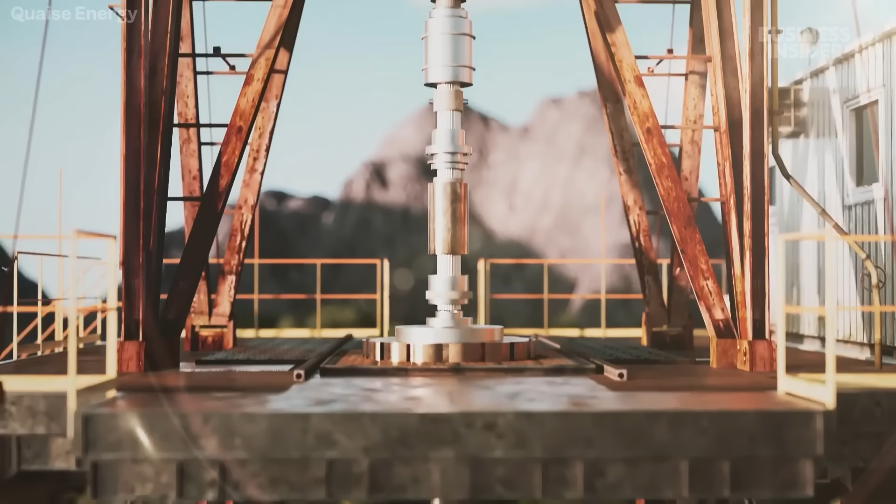Have you ever wondered how deep we could dig into the Earth? No one's ever gone deeper than 12 kilometers, about 7.5 miles, deeper than Mount Everest is tall, and that took the Soviets 20 years. Still, it's just a scratch on the surface, a mere 0.2% of the way to the Earth's core. It turns out the deeper you go, the more the Earth pushes back. But new technology could make it possible to dig further.

Whoa! That's it, it just started to fly apart. Just so you could see how this rock became literally glass.

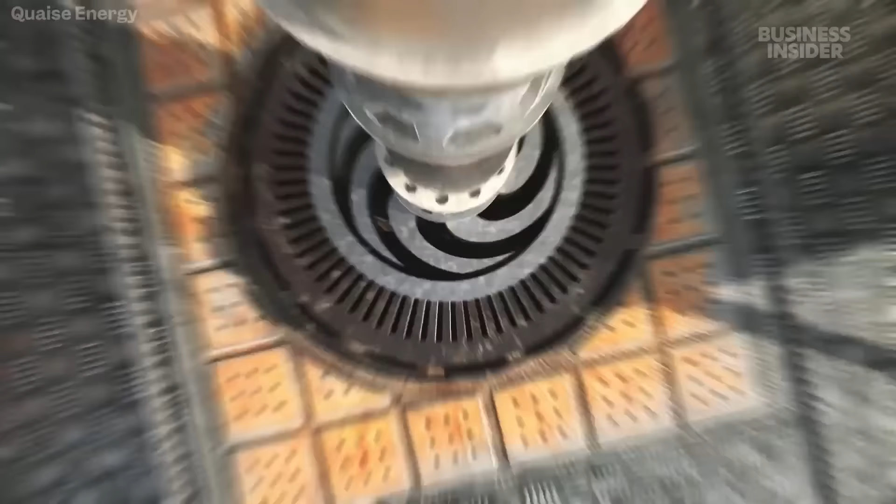And this could be the ticket to unlimited clean energy. At just depths down to 6 kilometers, you could produce 1,400 gigawatts of new geothermal power. That's bigger than the current US power grid. So can these drilling techniques make a 20-kilometer hole possible? And how far down can we actually go?

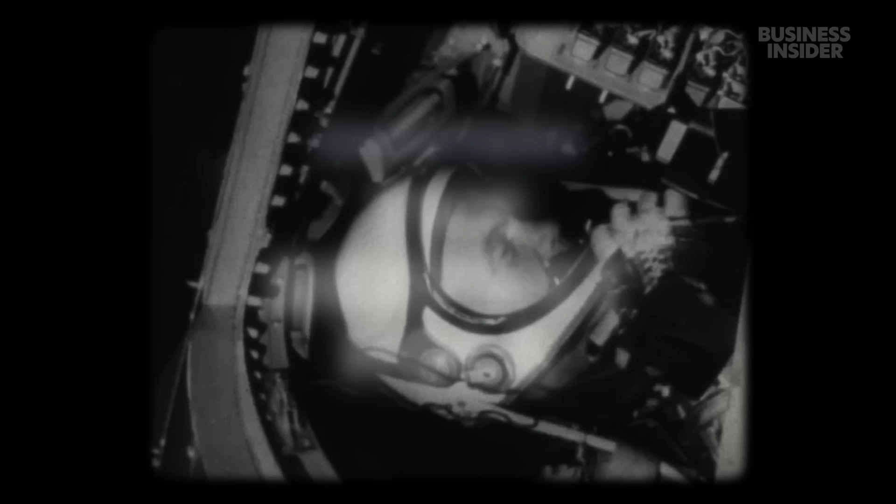Remember the space race between the US and the USSR? At the very same time, another race was underway, not toward the moon, but deep beneath our feet. And this time, the Americans didn't win. The ultimate goal was scientific.

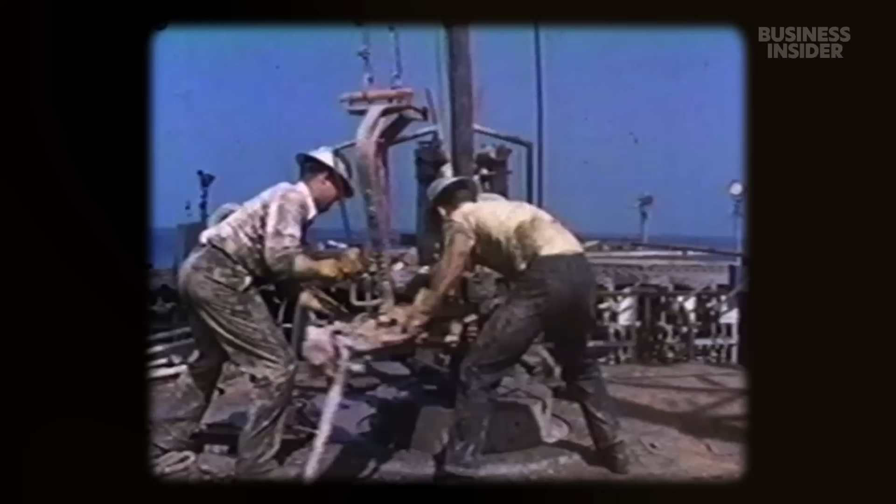The US started with Project Mohole in the 1960s, which hoped one day to drill a hole through the crust of the Earth and find out what's down there. The idea was simple: drill through the ocean floor, where the Earth's crust is thinner, and reach the mantle. In theory, it was the fastest way down.

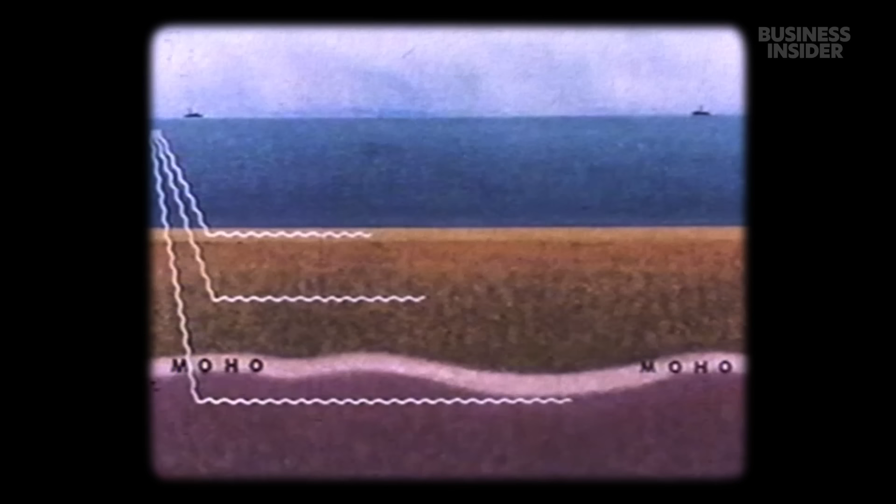To find a suitable spot to dig, researchers actually dropped bombs into the ocean. 3, 2, 1, 0. Over the side, over the side. The charge is over the side. It doesn't get any more American than that.

Then they used sonar readouts to measure the thickness of the Earth's crust. But after years of work and millions of dollars, it made it just 183 meters into the seabed, that's less than 2 football fields. The project was eventually cut short due to lack of funding, but the techniques they developed led to a boom in offshore oil drilling.

Meanwhile, the Soviet Union began drilling on the Kola Peninsula in the Arctic Circle. Back then, researchers expected to hit 15 kilometers, about 9.3 miles. But after 20 years of drilling, they reached a depth of 12,262 meters, that's deeper than the deepest point of the ocean, the Mariana Trench, located in the Pacific Ocean.

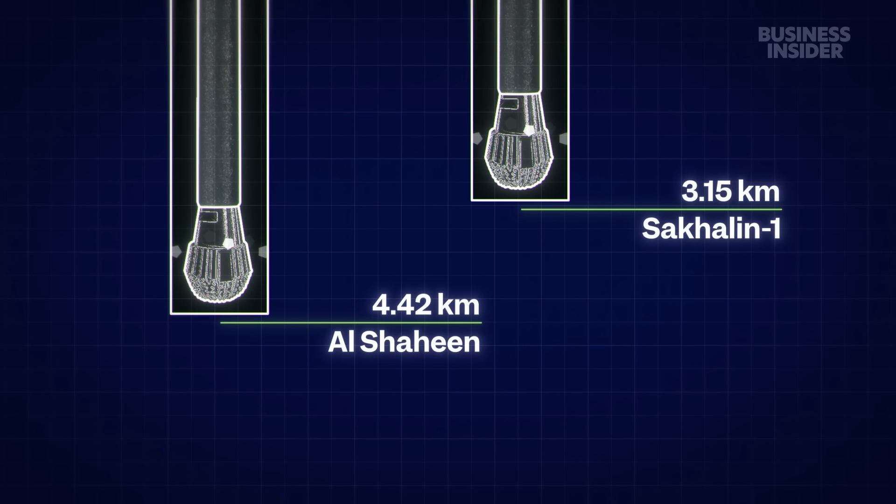Since then, there have been oil wells that dug for longer stretches, like the Al Shaheen well in Qatar and one in Russia. But this type of exploratory drilling doesn't actually go straight down, these wells often veer sideways for long stretches looking for those reservoirs of hydrocarbons. So to this day, the Kola borehole remains the deepest vertical hole.

Because the deeper you go, the hotter it gets. As we get below sort of 12, 15, 18,000 feet, we're getting into very hot formations, very high temperatures where actual drilling tools are struggling to survive.

So if we want to go deeper than Kola, we need tech that can withstand temperatures that rise about 25 degrees Celsius per kilometer. Look at the geothermal gradient and you can see the heat increase isn't linear. Things get super hot long before you reach the mantle, a layer of Earth that no one has yet hit. As you go deeper still, temperatures can climb into the thousands of degrees. In fact, 99% of Earth's mass is hotter than 1,000 degrees Celsius.

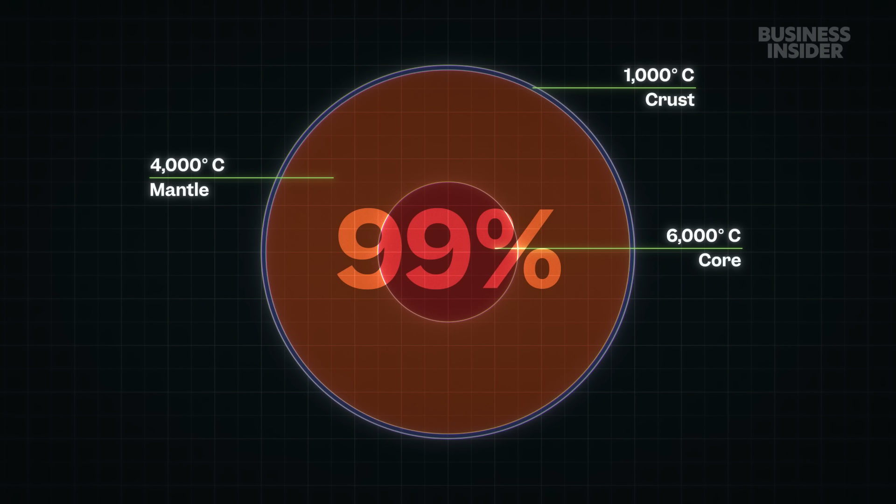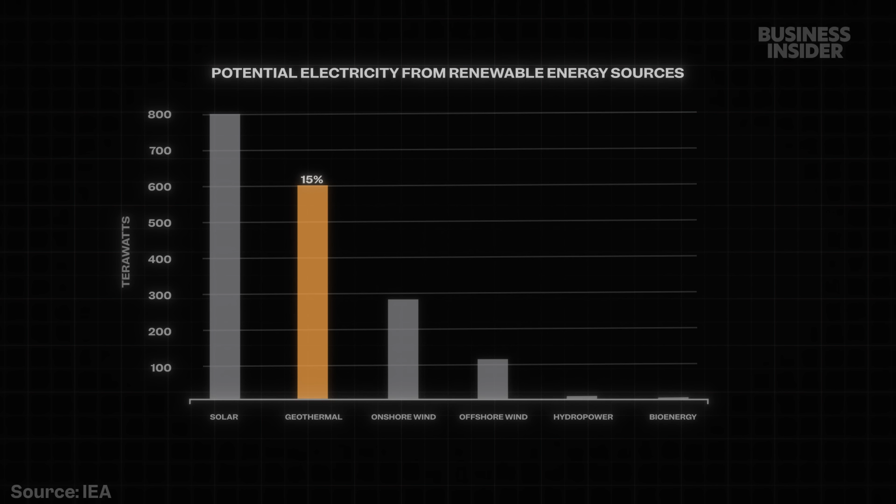But that heat is also exactly what makes geothermal energy possible, because if we can tap into it, it becomes a near limitless source of clean power. Right now, geothermal meets less than 1% of global energy demand. But if the technology keeps getting better, geothermal could cover up to 15% of the world's new electricity demand by 2050. So how does it work?

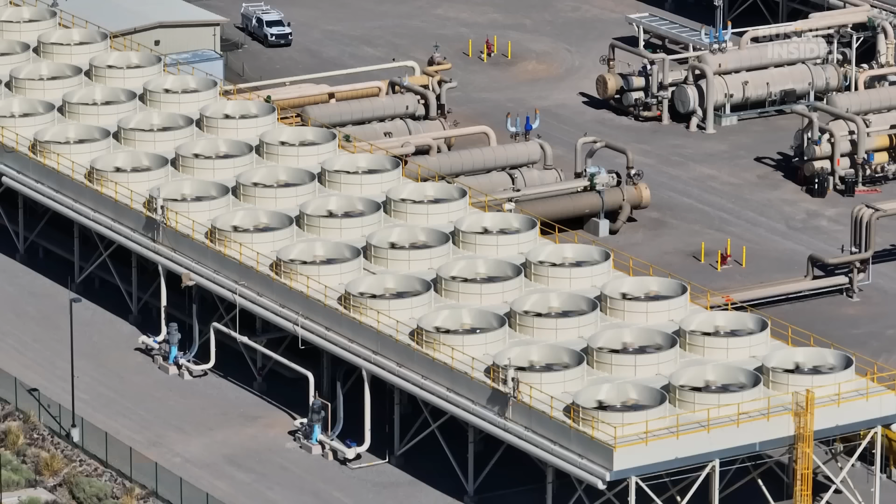Inject water deep underground or dig into existing reservoirs, then use heat from the Earth to turn it into steam. That steam spins turbines and generates electricity. Unlike solar and wind, geothermal could provide electricity 24 hours a day and all year round.

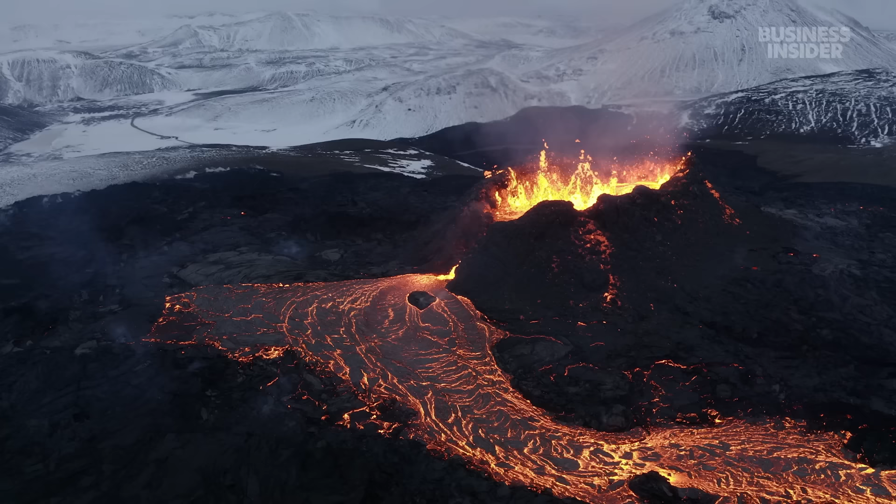This is exactly what happens in places like Iceland, where volcanic activity brings a lot of that underground heat closer to the surface. In Iceland, they actually made contact with magma at only 2.5 kilometers below the surface.

Iceland's large-scale shift to geothermal energy was driven by the 1973 oil crisis, when rising prices and geopolitical instability highlighted the risks of energy dependence. At the time, half of the homes relied on imported fossil fuel for heating, which was expensive for the country. So Iceland turned underground. Today, nearly 30% of the country's electricity comes from geothermal, and about 90% of homes there are heated this way. And Iceland is not alone.

That's why we're in Houston, Texas today, and we're going to a company called Quaise that's digging deeper using literal energy beams to vaporize rock. All right, so this is where the magic happens.

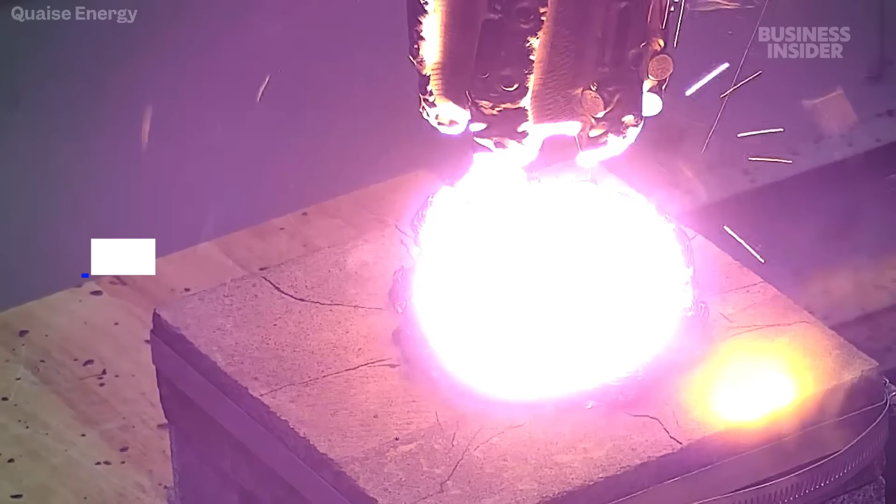Quaise is a startup with a very ambitious goal. They want to be able to drill down to 20 kilometers underground. At that depth, the temperature can reach up to 500 degrees Celsius, which is enough to destroy any kind of conventional drilling equipment. That's why they're using something called millimeter wave. And the idea behind it is that it's using a special kind of technology that comes from fusion energy to literally shoot at the rock and vaporize it, melting it into glass.

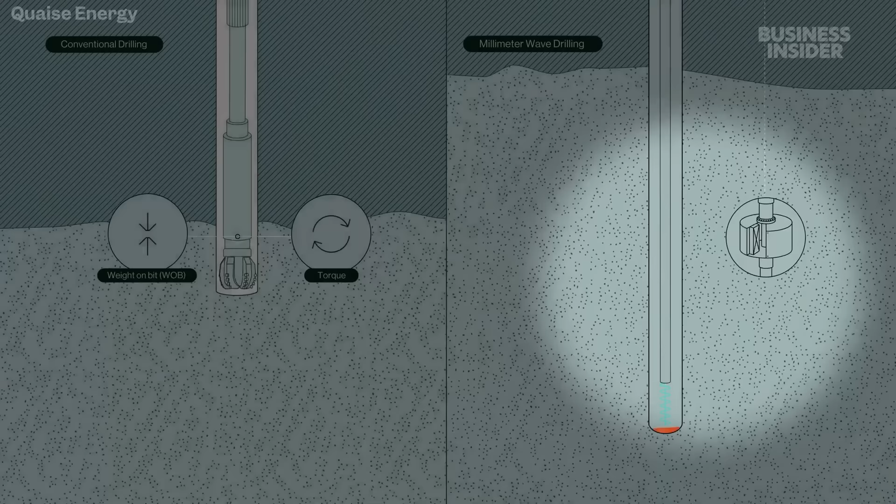In the simplest layman's terms possible, what is millimeter wave drilling? Millimeter wave drilling is using microwave to do dielectric heating to get to very hot rock. Conventional drilling uses a mechanical bit to pulverize rock, but at extreme depths, it gets harder to power the system and it breaks a lot. Quaise uses electromagnetic energy to melt rock, and in theory, the millimeter waves maintain their power even over long distances.

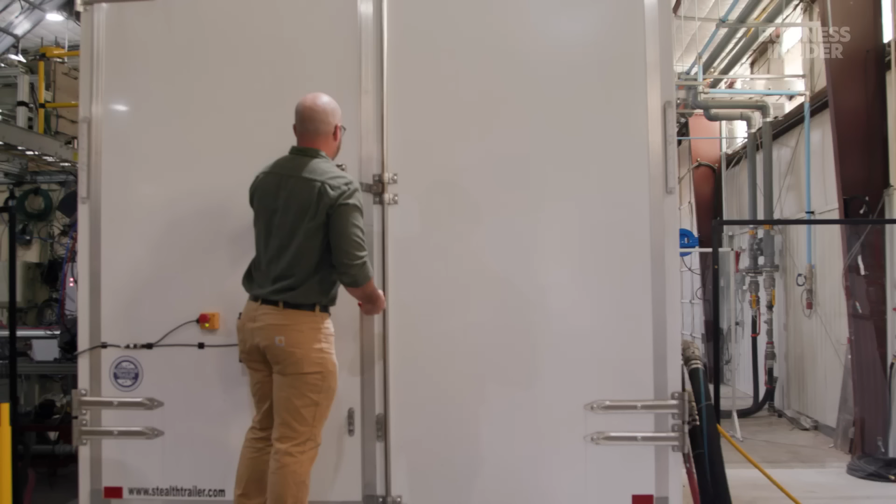It took MIT over a decade to develop this technique in a lab. The device that creates the energy beam hot enough to do this is called a gyrotron, and it actually originates in nuclear fusion energy. It converts electrical power to microwave power. That's important for us because it's able to make upward of 1 megawatt of microwave power. You can see that the magnet's on because it's using electromagnetism.

So apparently, I don't know what would happen. Would it suck? It would suck our cameras right to it, or it could disturb some of it. Yeah. We don't bring our phones in there. We don't bring any kind of tools that are magnetic in there. Oh, okay. So it could fly. It's like an MRI machine. Oh, it's like an MRI. So yeah, you know what? And actually, if you hear, I'm gonna put the microphone closer to there. If you hear, it actually sounds exactly like an MRI. If you've ever gotten an MRI, so listen to this.

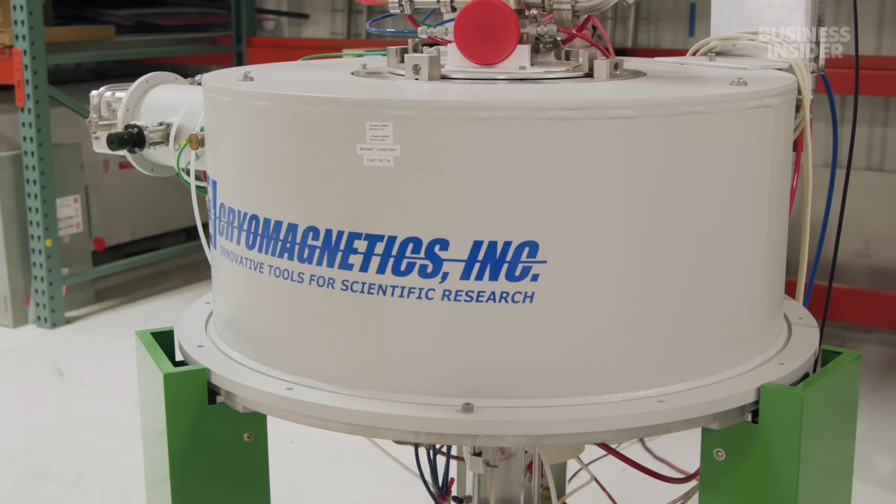That's actually the sound of the cooling system. The gyrotron's superconducting magnet needs to stay near negative 270 degrees Celsius to function properly.

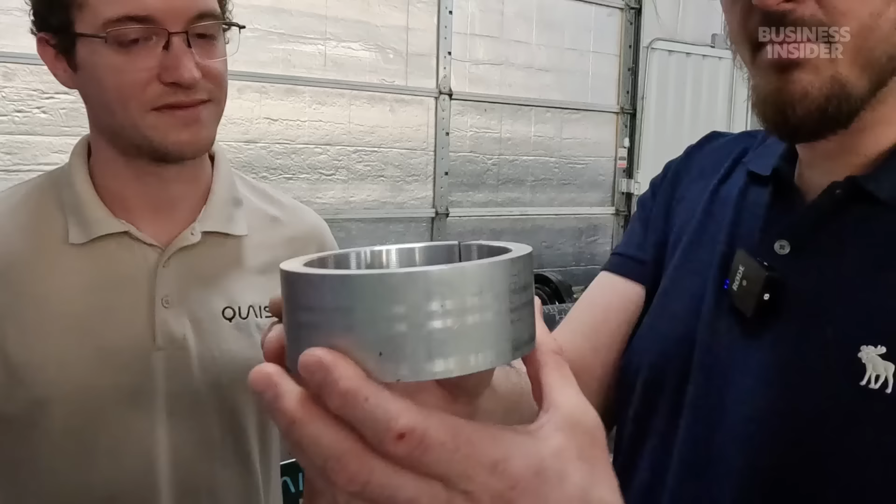Quaise channels the beam through a hollow pipe that looks like it has screw threads inside. So what you see here is the waveguide, and the millimeter wave is actually going inside there, all the way to the bottom. So basically, this kind of pipe is what's going to be going all the way down any hole you dig, right? That's right. So we start with a conventional drill rig to drill as deep as they can, and then we come with our technology.

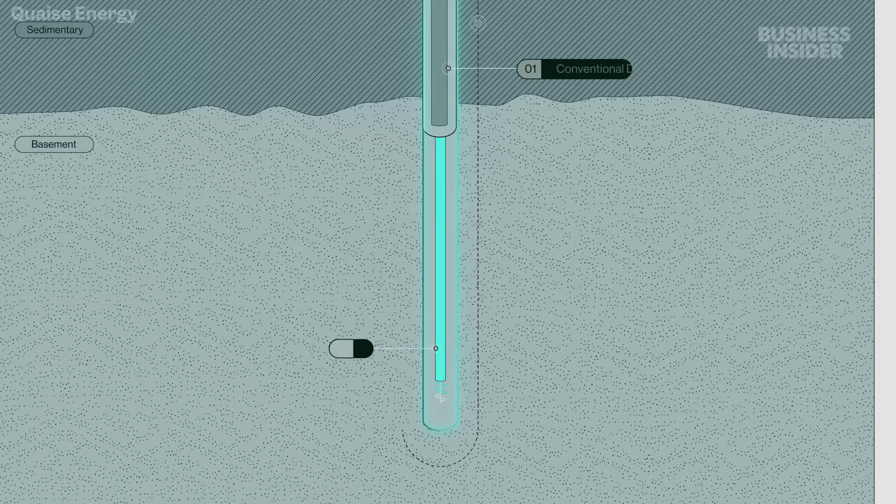So the Quaise approach is less like drilling and more like burning a hole through the earth. In theory, this solves one of the biggest problems. If nothing touches the rock, nothing overheats. The way we address it is that we're not putting equipment down hole that could be subjected to the temperature that could damage or fail the drilling process in that regard. So we're not eliminating the heat. Obviously we want to get to the heat, but we're able to continue drilling in spite of the heat.

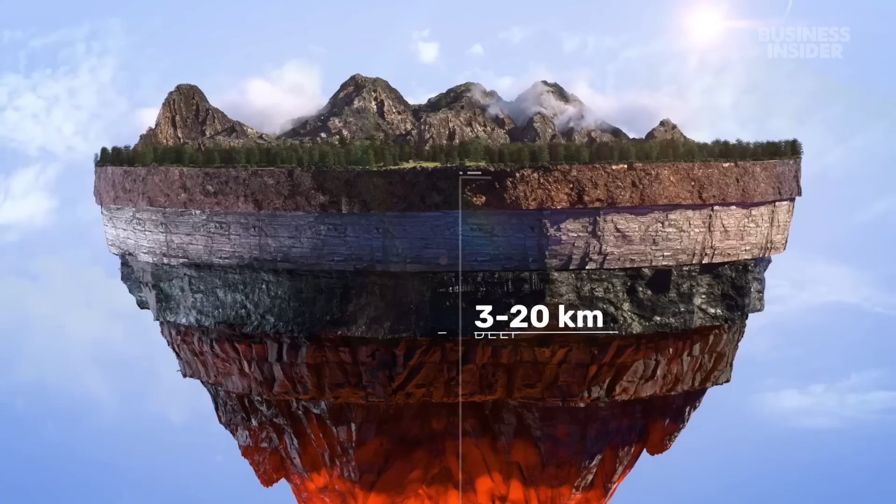Here's why they want rock that hot. At those temperatures and pressures, water enters a fourth state called supercritical. It's not quite gas and it's not quite liquid, and it carries far more energy than steam. Quaise says a single supercritical well could produce up to 10 times as much energy as a conventional geothermal project.

And Quaise gave us a live demonstration on how they plan to reach it. We're gonna put in earplugs, not because of the millimeter wave, but because the compressed air that comes into the system is very loud. So I'm putting in earplugs right now.

Whoa! Isn't that insane? The light is completely bright. I guess you can see how the air is pushing all the other stuff out of the way.

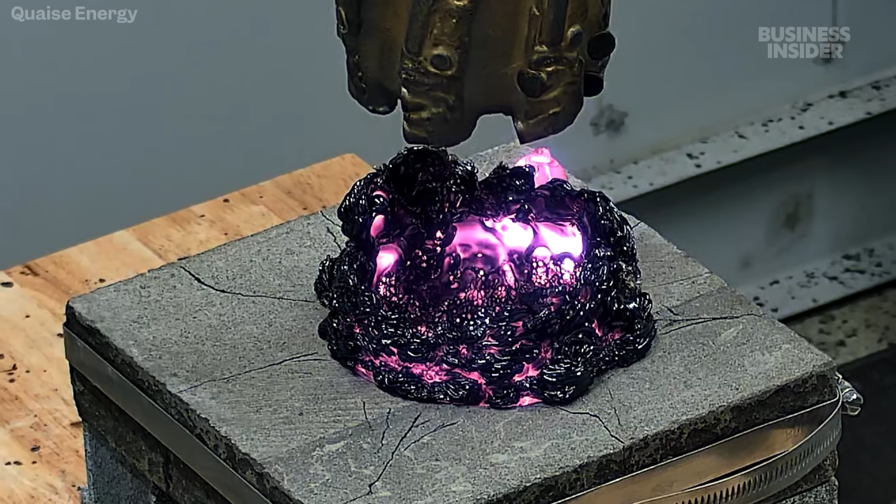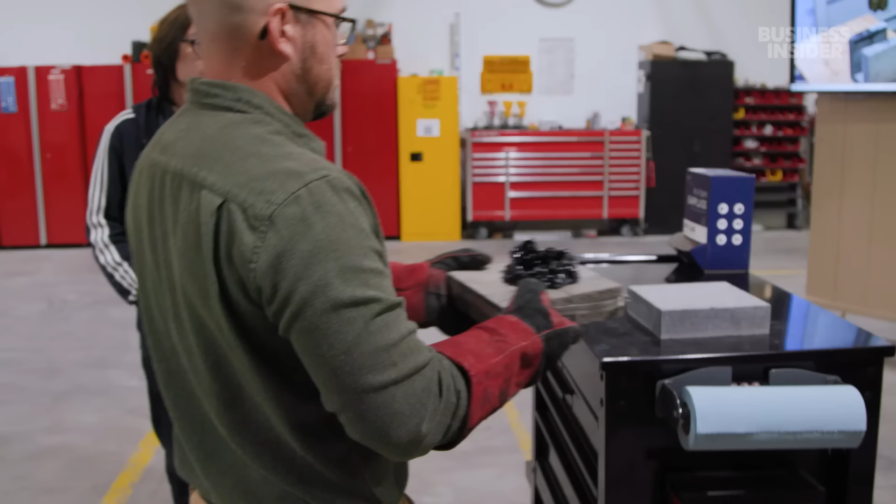Okay, 30 more seconds to go. That's it. Oh man, that's so cool. You could see it's like lava cooling, right? I'd say the heat hitting my hands right now is probably like a campfire that's died down—not too hot to touch. I can still hear it crackling, which is kind of gnarly, but you can see how this rock became literally glass.

If the drilling thing doesn't work out, maybe you guys can use this to get into a bank vault or something, I don't know. Well, we said we could just make ashtrays. I know people don't smoke anymore, but that would be an awesome ashtray.

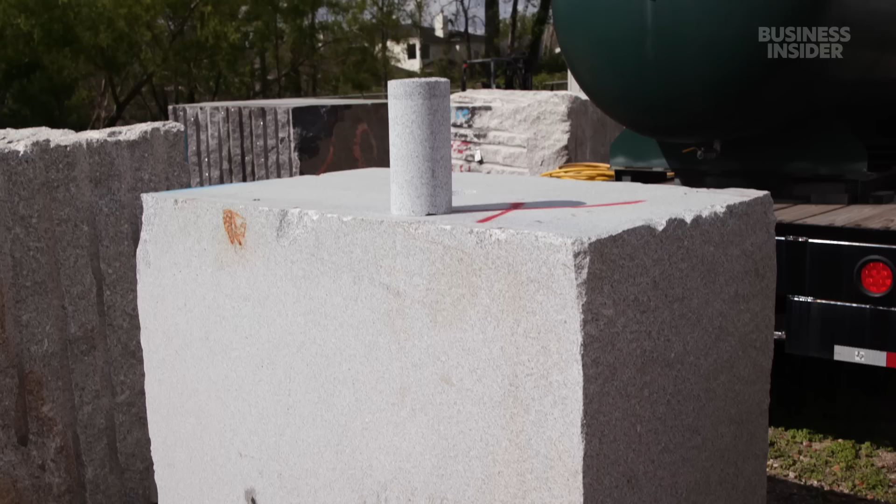To understand what they might encounter deep underground, Quaise hauls huge chunks of rock into the lab. We're out back of the lab now. These are 10,000-pound blocks of rock, representing the different kinds of rock Quaise might encounter once they start digging down. They use these for testing, and they're very heavy and very expensive to get here.

How the hell do you move these things? It is incredibly expensive—obviously you need a big forklift that can carry the weight. It's also incredibly expensive just getting it from a quarry of this size to us. It's just part of the business.

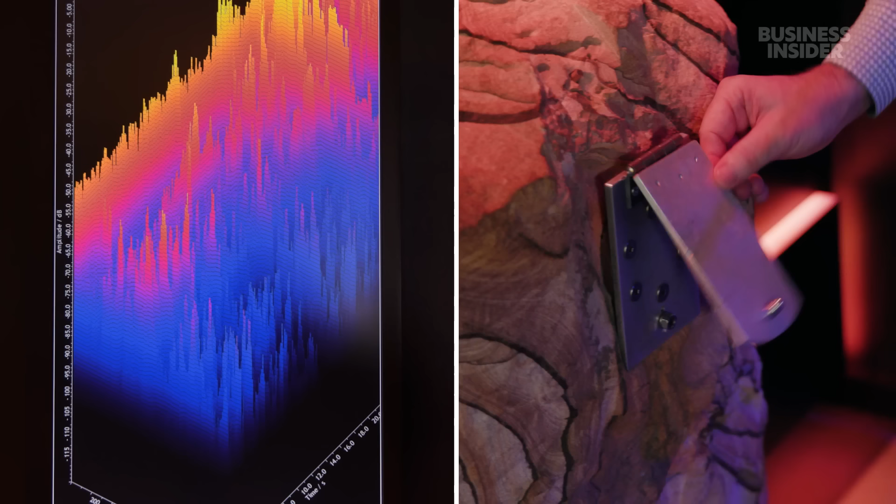But even if you solve heat, there's another problem: pressure. There are even more challenges when you're digging super deep. To show you what that looks like, we came to the Wiess Energy Hall at the Houston Museum of Natural Science. We're going to take you around and show you a couple of exhibits in a way you can't see anywhere else.

So what you see above me is a gigantic representation of a drill bit coming down a borehole. This is probably 30 or 40 times the scale, but it gives you a sense of how these rotating bits create momentum going down into the hole, removing material and pushing it out towards the sides.

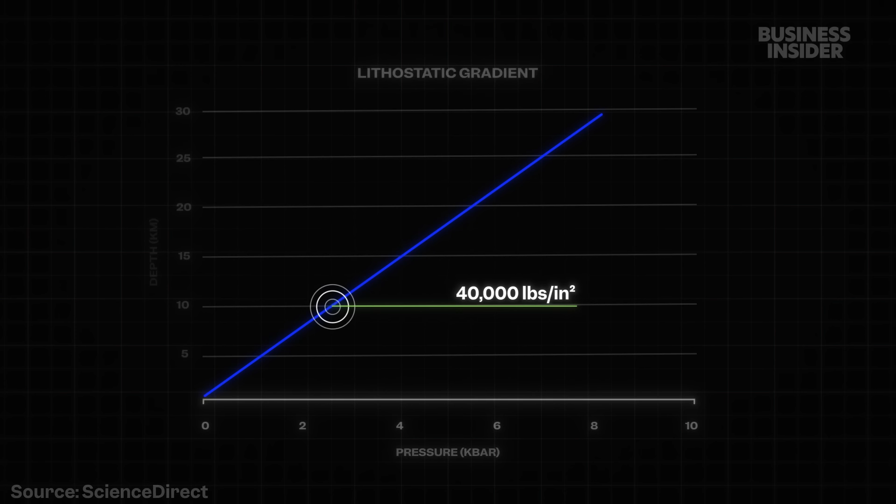Once you're getting down deeper and deeper, the rock isn't just hot, it's also heavy. That's what engineers call lithostatic pressure. At 10 kilometers down, you're under 40,000 pounds of pressure per square inch. You're basically trying to hold something open that wants to close.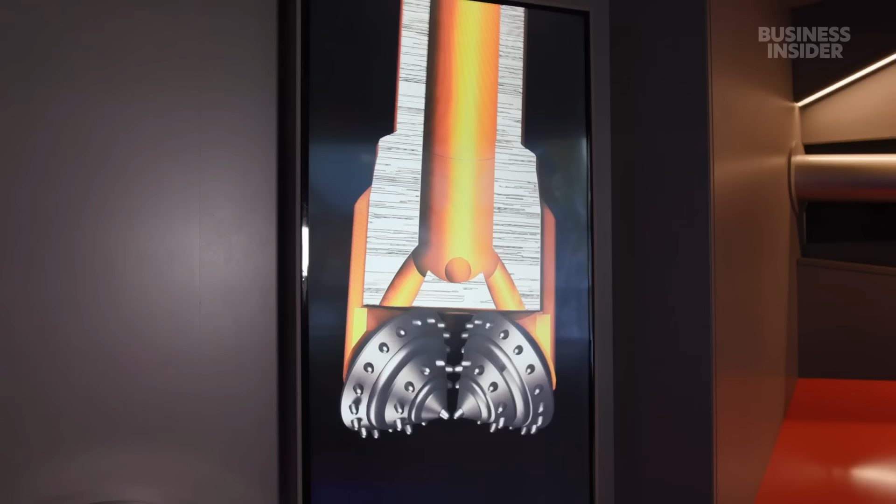So what engineers do is something that might seem counterintuitive—they actually fill the holes they dig with drilling mud. This drilling mud does three things: first, it cools the bit; second, it lubricates the entire system; and third, it counteracts the pressure acting on the borehole as they go deeper and deeper.

What this display is showing is that this mud has a viscosity meant to slow down the flow of the balls going downwards. You can see how getting that dialed in just right is important to keeping the borehole stable.

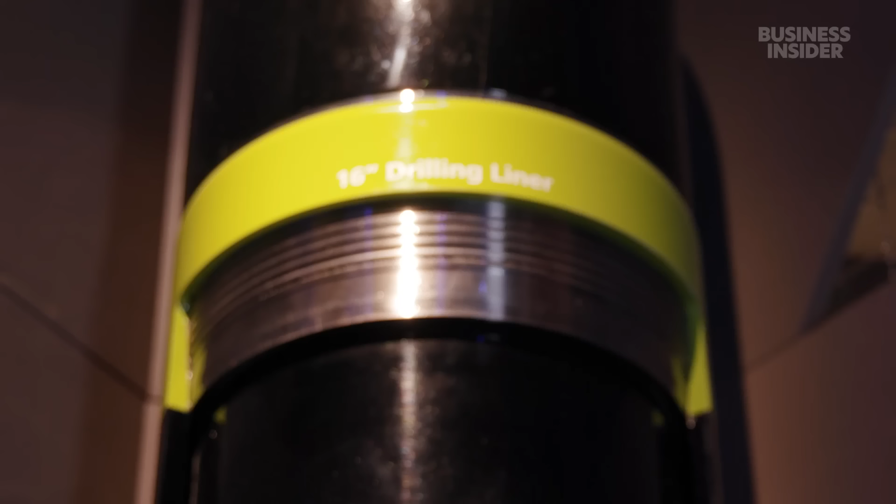As you go deeper, something even stranger happens—the rock stops acting like a solid block and starts acting more like plastic. That's where casing comes in, holding up the sides of the borehole as you go down and allowing you to drop a narrower and narrower channel of pipe to reach those deeper depths. As you can see from this example, we've started out with the widest possible drilling bore, 16 inches, and it goes all the way down to 5.5 inches.

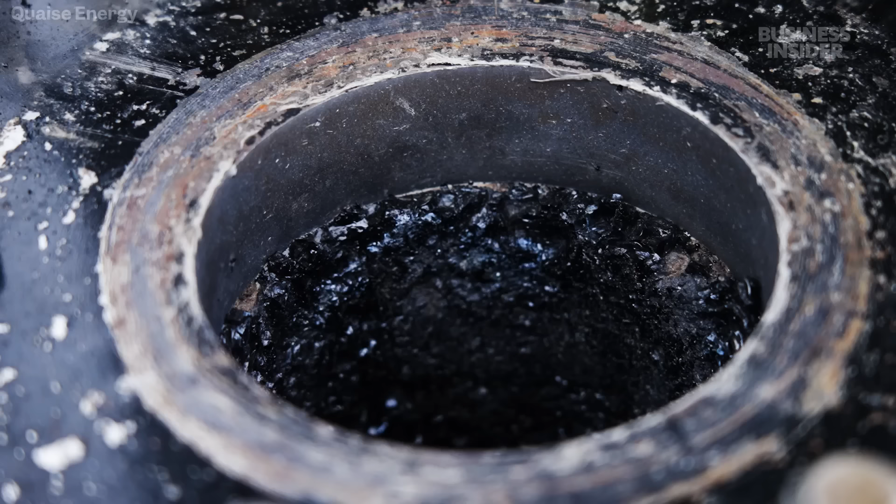Quaise believes their system could also solve the casing issue. As the rock melted by the millimeter waves cools, it solidifies into a glassy lining around the borehole, creating a hardened layer that helps keep the hole stable. Just feeling the texture of it, I do feel that volcanic glass feel.

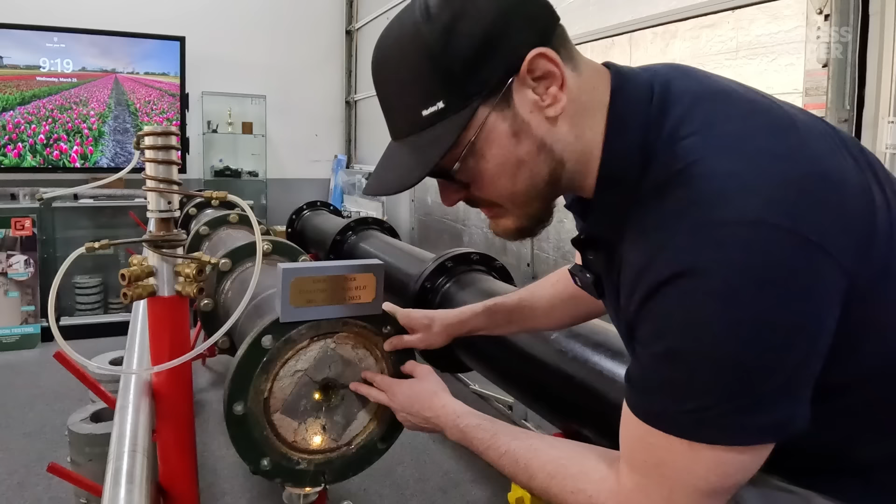It reminds me of when you had a piece of obsidian, if you ever had a rock collection at home—that's really what it feels like. In other words, it's a sort of ready-made casing.

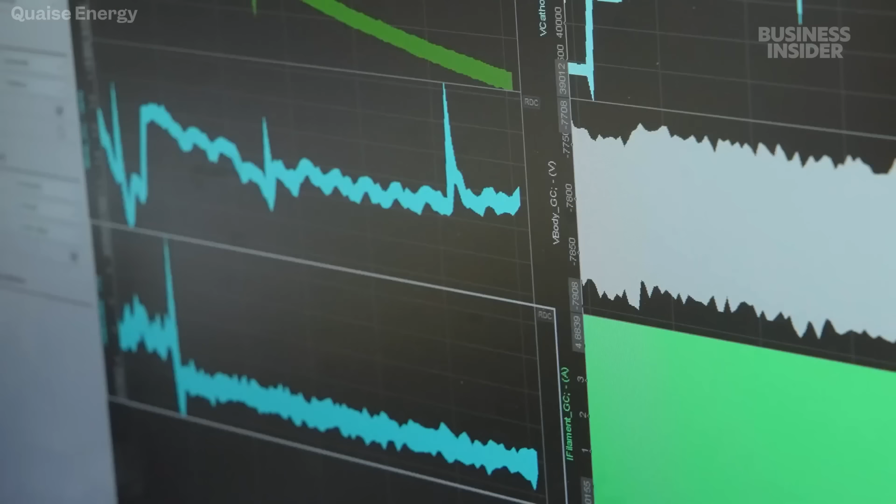But can this work at extreme depths? Over the years, Quaise has proven they could dig past 100 meters, and now they've set up a test site in Marble Falls, Texas, where they're aiming to reach 1 kilometer by the end of the year. We really want to show that we're going to do 1 kilometer, and it's really to show that we're very close to our goal of 10 kilometers. It's 10x more, but 1 kilometer really gives you that depth where it is a viable option from a field point of view. We hit the road to find out.

This morning, we were heading from Houston, Texas, where Quaise's lab is, to their test site in Marble Falls, which is on the other side of Austin, where Quaise is actually bringing their technology to life in the real world.

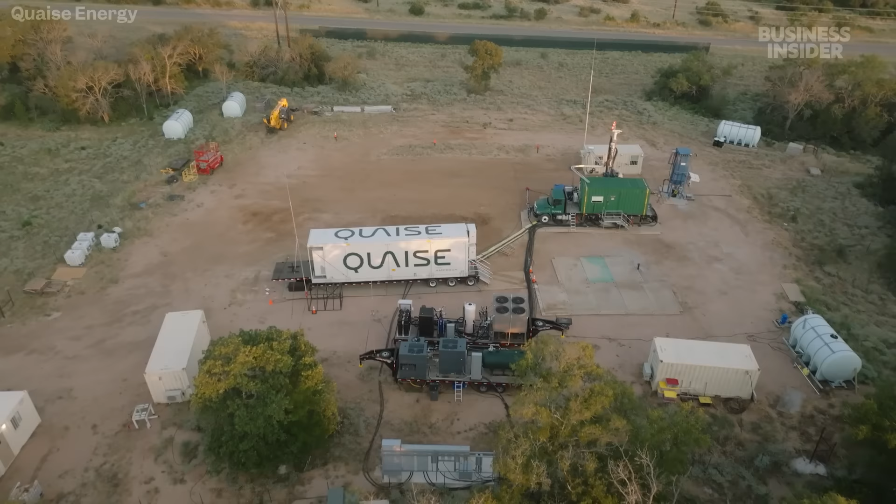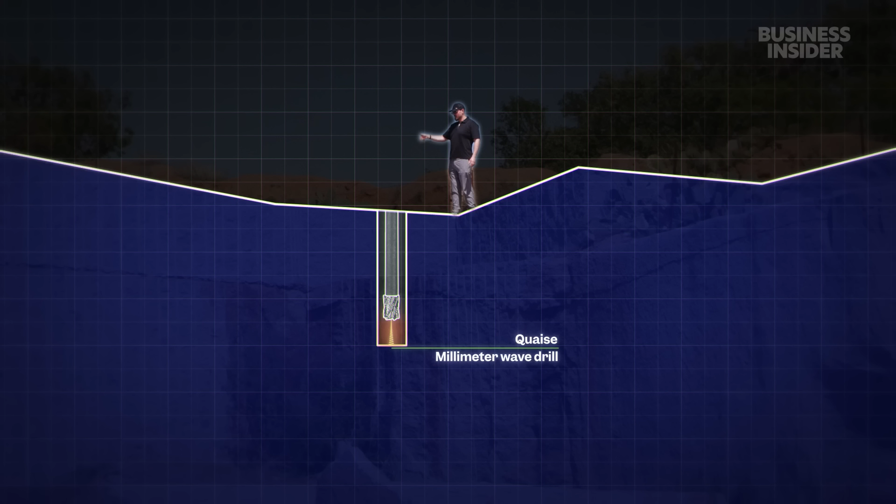I'm standing at the edge of a granite quarry, and you can see why Quaise would select this site to test their technology. Behind me, there's layers of sand and clay that have accumulated—that's called overburden. But not much further down, you've got this nice pink granite everywhere. What Quaise is able to do is, without digging too deep, get to this granite layer and start using their millimeter wave drill to really get through it. This is a perfect site for Quaise to start proving that their technology works on the hardest rock, found in the deepest layers, to get to that supercritical geothermal.

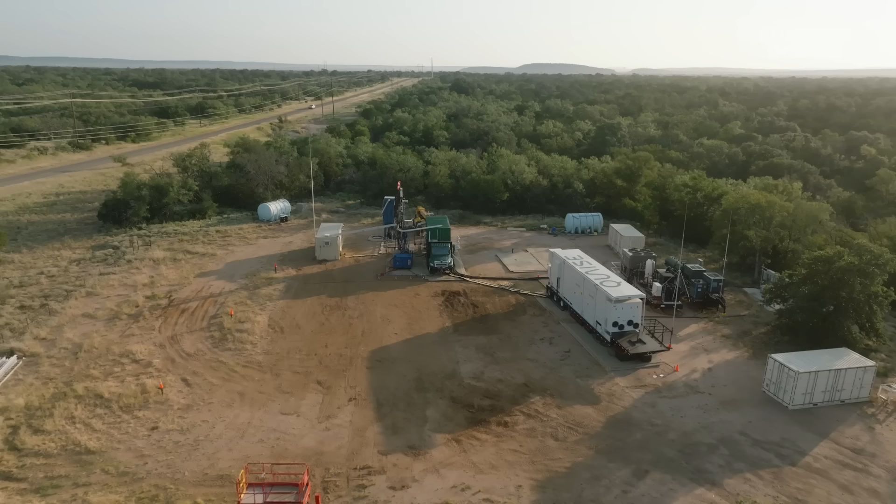This is the first location where Quaise has taken their technology out of the lab setting and into the real world. And obviously it's a work site, so I've got to have my hard hat and my safety glasses here.

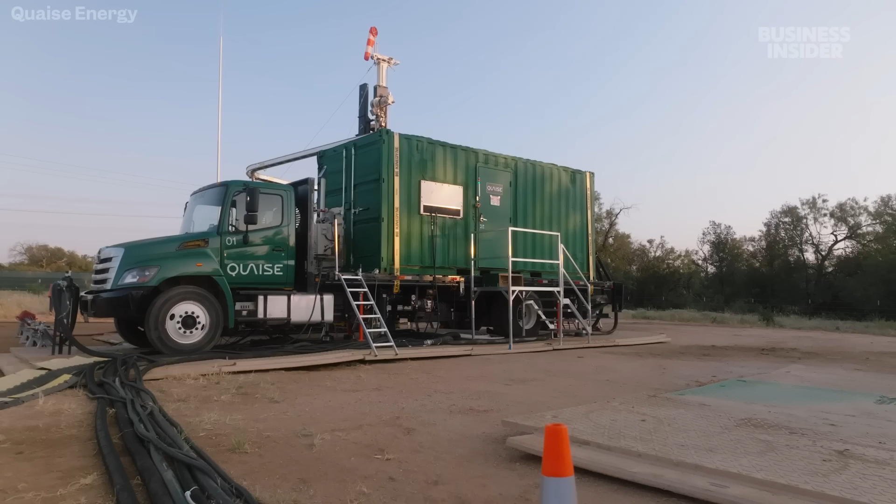Okay, let's go. The gyrotron rig here can run on diesel, but for now it's connected to the grid. I wonder what your monthly electricity bill is. It's not great.

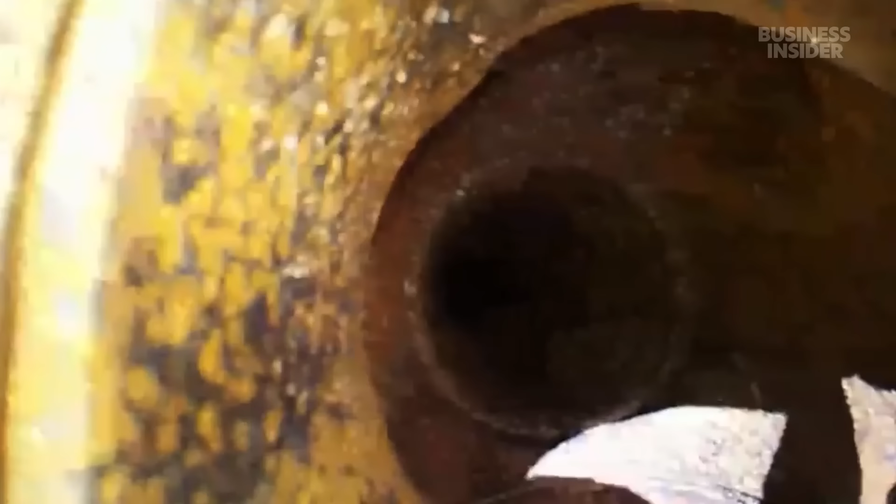So Steve, this hole is going to be the 1 kilometer hole? That is correct, yep. So we'll be up and drilling in about 6 weeks, and then we're expecting to hit it in the summer. So we're talking maybe 2 months to get to 1 kilometer on this. They're going to take this wireline camera and drop it down the existing hole, so we're going to get an inside peek into the beginning of the 1 kilometer hole.

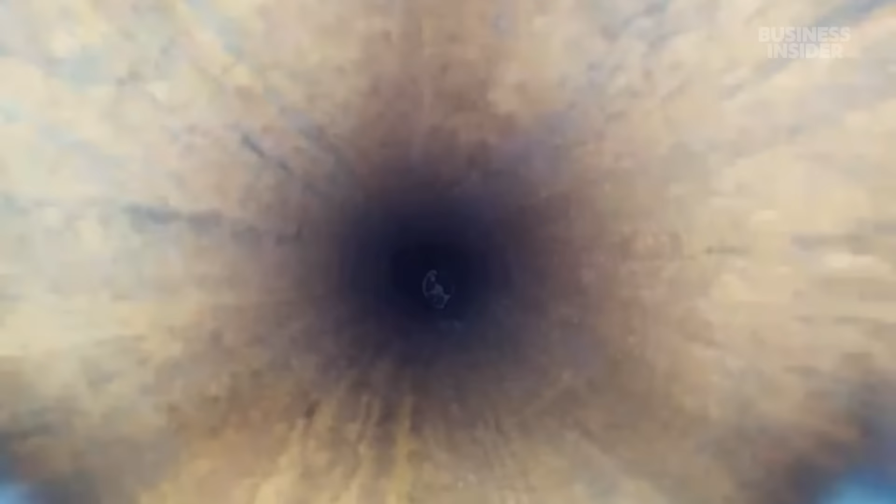What's interesting though is that the sides of this don't look like what we saw in the lab, like more vitrified. Is there a reason for that? We are able to go that route as well. It's faster without it—you don't need that hard shell to prove the point of what you're doing. That's correct.

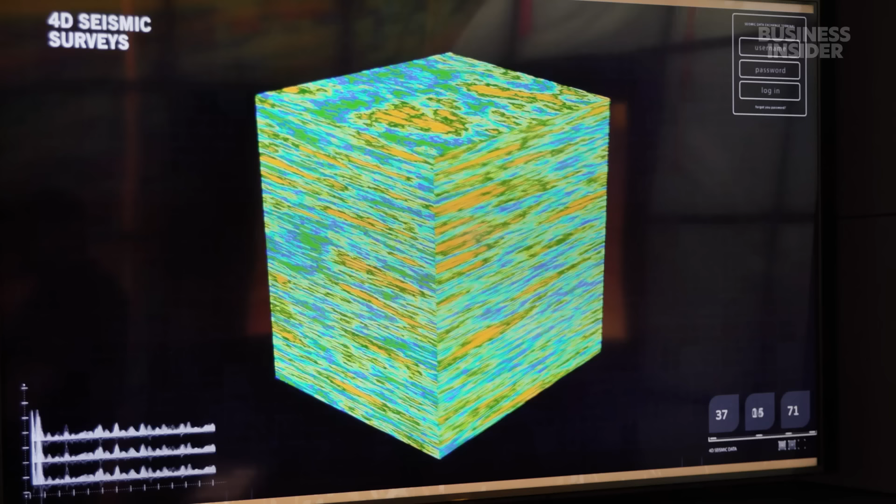Got it. There's another problem with drilling deep into the earth: we don't actually know what's down there. Most of what we can tell about the inside of the earth comes from seismic waves. How they travel and bend or slow down or speed up tells us what the different materials could be under the ground. We saw how some of this seismic exploration works at the museum.

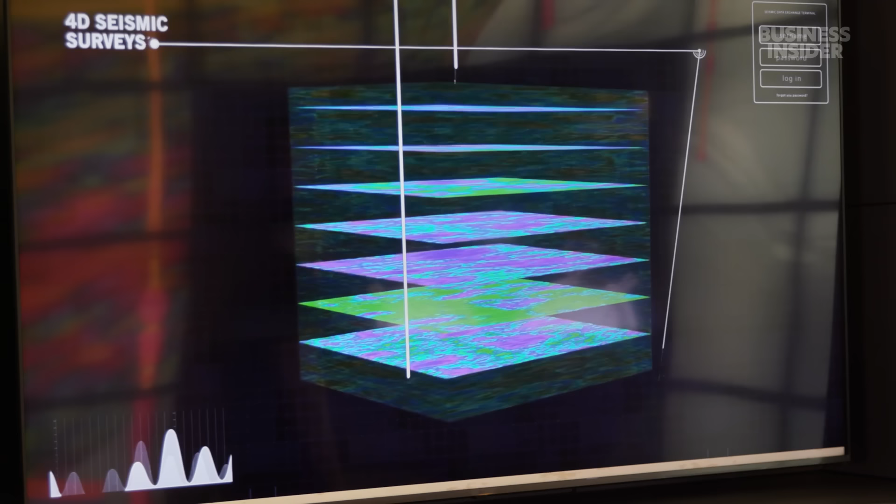So you could see on this cube, it's representing different layers that could contain hydrocarbons, which is more for the traditional, conventional fracking industry. But this is the kind of seismic survey that you might see to understand what's below as you go deeper and deeper into the ground. And this is also part of this demonstration.

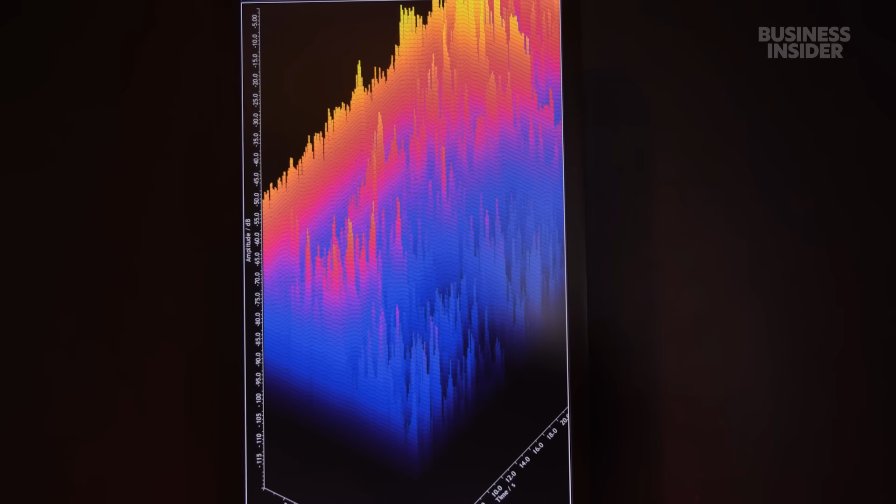But scientists keep discovering new layers, like the potential of a core inside the core of the Earth. For example, when scientists started the Kola Superdeep Borehole, they thought they'd know what they'd hit.

Based on seismic data, they expected to find a layer of basalt. Instead, they found water and hydrogen gas. In the US, the deepest hole ever drilled, the Bertha Rogers well in Oklahoma, had to be stopped when it hit molten sulfur and broke the bit. So the deeper we go, the less certain things become, and every surprise pushes the machinery to its limits.

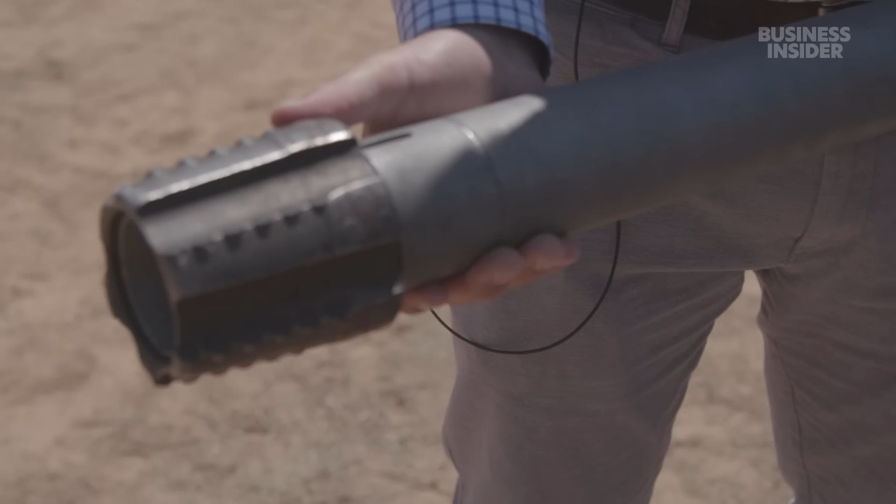And all this drilling can create unexpected outcomes, like earthquakes. I would say that if you want to create an earthquake, you can create an earthquake. But there is a really widespread engagement with the fact that that is totally not an acceptable outcome.

In November 2017, a magnitude 5.4 earthquake struck near the city of Pohang in South Korea. Later investigations concluded that it wasn't a natural event. Rather, the earthquake had been triggered by an experimental geothermal project. The quake left 1,800 people displaced and 135 injured. It also caused at least $123 million in damage. The nation's energy ministry expressed deep regret and said it would dismantle this project.

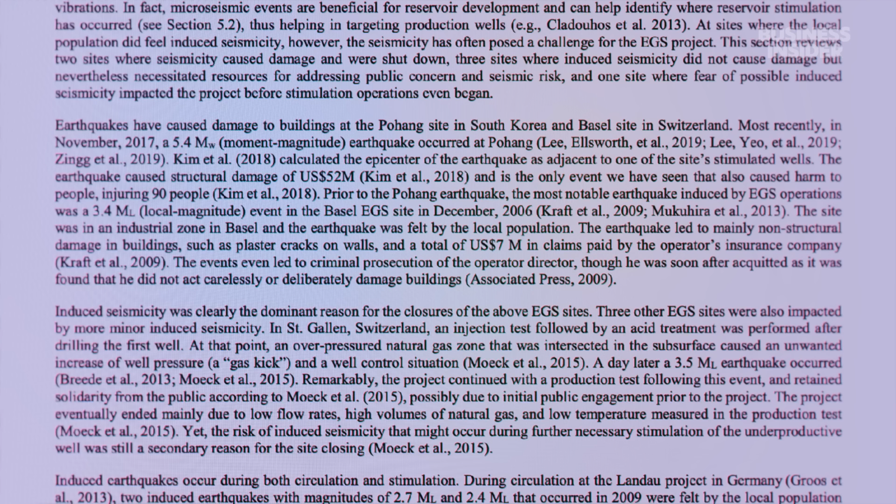Prior to that, the most notable earthquake induced by exploration for geothermal was in Basel, Switzerland. In December 2006, a 3.4 magnitude earthquake led to minor building damage. But the operator's insurance company paid out over $7 million in claims and eventually shut the project down.

What about this idea that drilling, I mean, any kind of drilling, but this idea that drilling can create seismic activity that can create earthquakes, and how do you mitigate that? Yeah, so to be clear, the drilling aspect of it doesn't create any type of seismic issue.

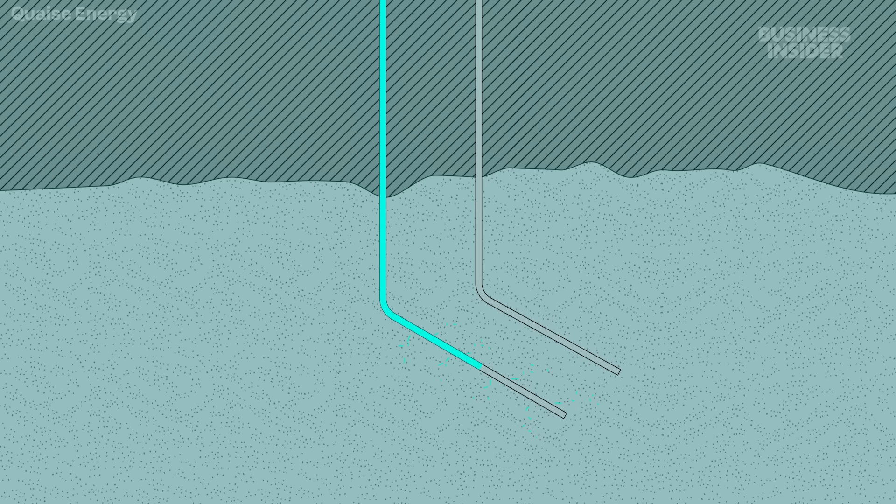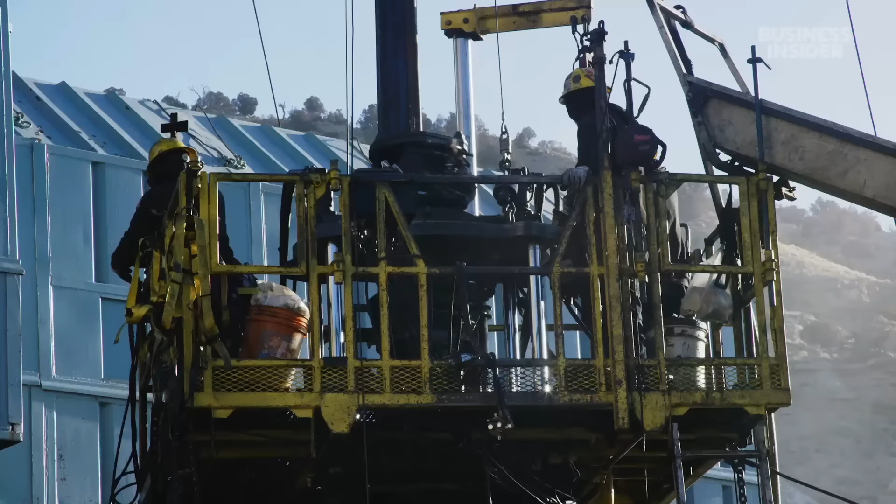It's obviously when you try to do what we call the EGS aspect, when we're actually connecting between the two wells, where potentially you could have these type of issues. Now the oil and gas industry has matured this significantly, where now there's regulation in place, there's sensors in place to make sure that you never go above a threshold that's unacceptable in that regard. Really, that threshold is the same as what you typically see in a football game or a rock concert. That's the standard now in terms of vibration. So it's very well managed in terms of the acceptable level. We never cross that threshold.

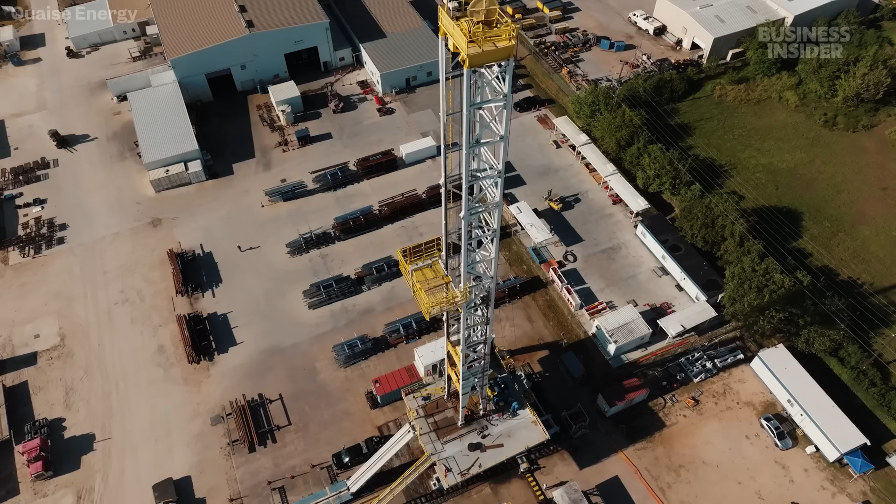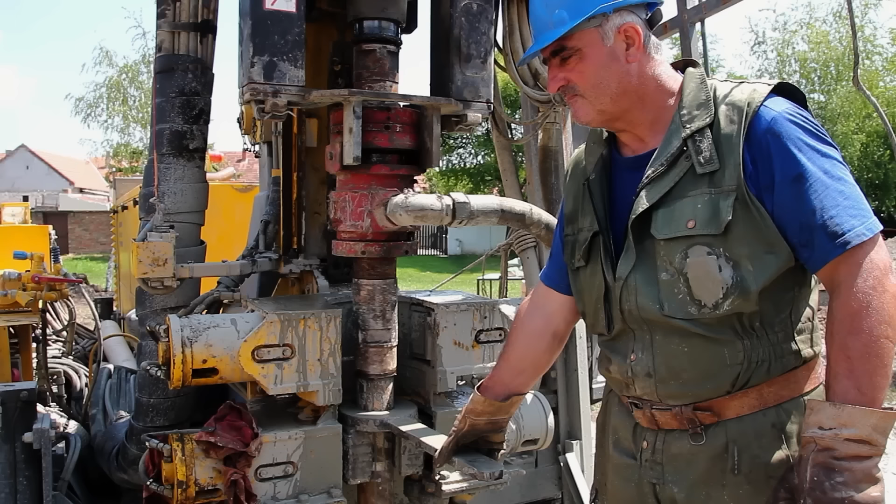Another challenge for expanding geothermal is cost. Drilling deeper is slow, risky, and more expensive with every kilometer, because it means more rig time, more crew, more wear on equipment, and more risk of failure. In fact, most of the time in conventional drilling is spent pulling up the rig and replacing a damaged bit. The core problem is upfront cost and uncertainty. You have to spend tens to hundreds of millions of dollars before you will know if a well will actually produce usable energy. That makes deep geothermal difficult to finance compared to solar, wind, or even conventional oil and gas.

Historically, projects like Kola cost on the order of $100 million, and that's not even adjusted for inflation. So the economic constraint isn't just, can we drill deeper? It's, can we drill deep enough, fast enough, and cheap enough to compete with other forms of energy? That's a yes, according to the CEO of Quaise, who recently testified at a congressional hearing.

So normally when you're drilling, you are trending in the $1,000 to $2,000 per meter range. That's typical in oil and gas. It's cheaper in mining because it's a different use case. So what happens though when you go deeper and hotter is that $1,000 to $2,000 per meter starts to blow up exponentially on you. To give you a sense, you can get as high as $10,000 to $20,000 to $30,000 per meter to continue making progress once you're below 3, 4, 5 miles. So we're trying to just stick to that $1,000 to $2,000 per meter regardless of depth, because that's what makes it economically viable and accessible.

And Henry told me that once a Quaise geothermal plant is up and running, it will prove more economically viable over time. The industry term for that is levelized cost of electricity. It's basically the cost per unit of electricity that a project needs to break even over the course of its lifetime. Quaise has an LCOE calculator on their website, and what it does is it allows you to go to a map of the United States, put a pin anywhere to get a cost of what a geothermal project would have in your area.

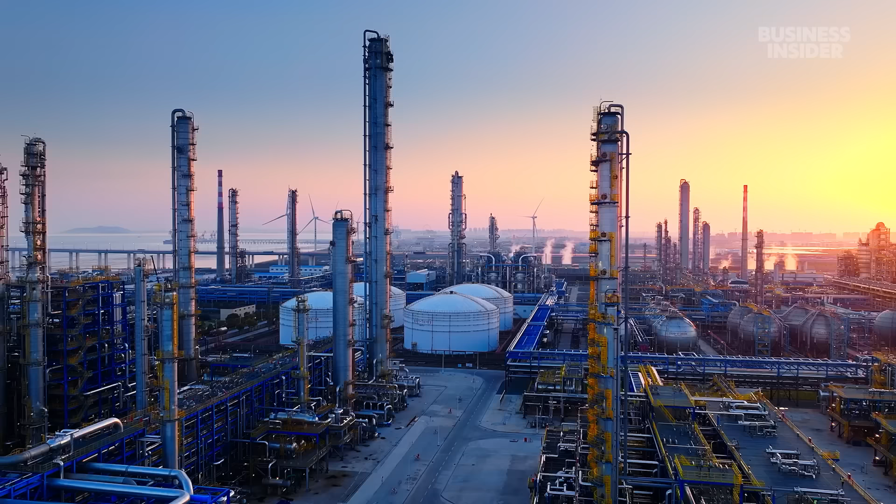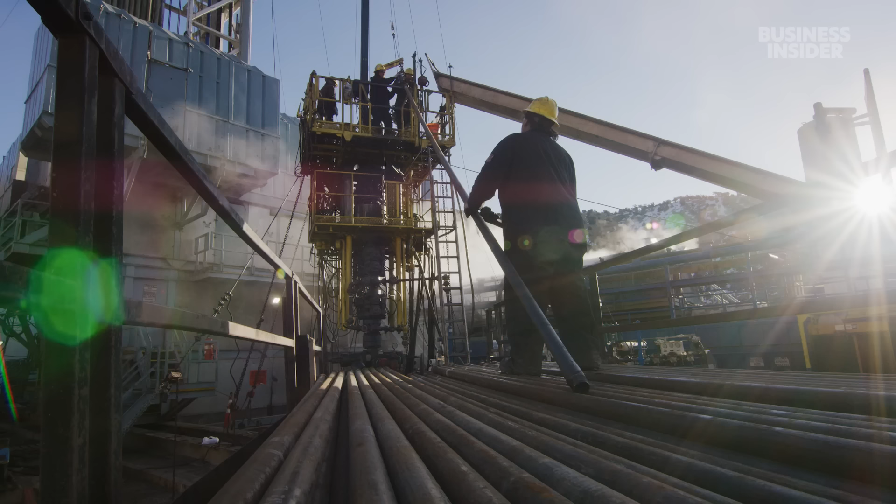This is where oil and gas comes in, because geothermal isn't completely new. It's built on top of an industry that already exists. Up to 80% of the investment required in a geothermal project involves capacity and skills that are common in oil and gas. And today, a large share of that workforce comes directly from the oil and gas industry.

There's 2,000 rigs around the world, with all the rig hands and all the people who know how to operate it. We basically give them a new set of tools. In fact, some of the people we met here working for Quaise come from fracking.

We're in the drilling cabin, AKA the dog house, and I'm here with Mike, Ethan, and Sam. These guys are on site, living nearby 15 days out of the month, 15 days off, but they're committed to this site and they're going to be the ones making sure this hole goes down to 1 kilometer.

So I just wanted to talk to you guys because you could be part of a new wave of energy. Do you ever think about that and what that might mean for the future of everybody? Supercritical seems like the major unlock to take geothermal to the next level.

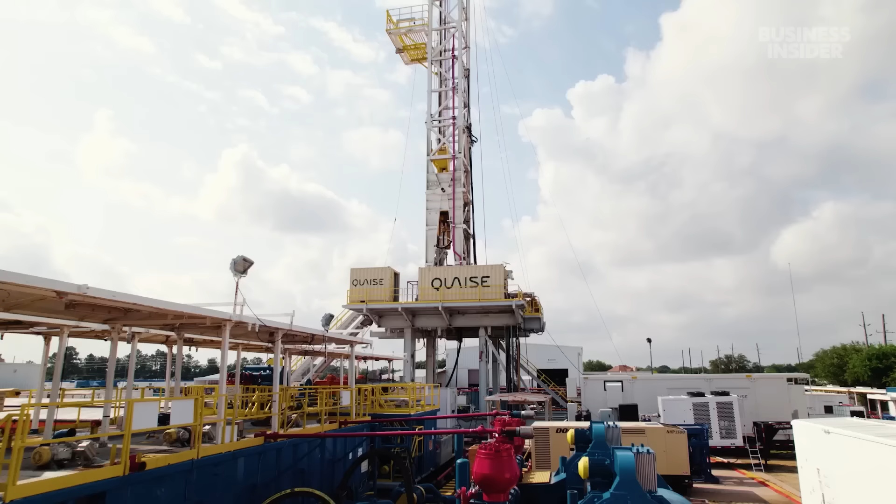And there's some companies dabbling in it, kind of researching it. Quaise attracted me personally just because they're full on committed to making super hot, supercritical happen.

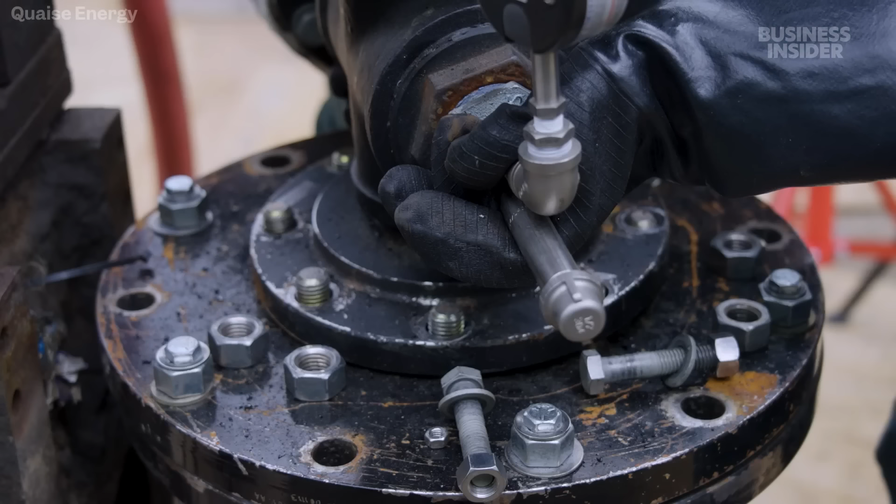All the basic tools are the same, the expertise is similar, and even techniques like horizontal drilling and hydraulic stimulation come from fracking, which means if geothermal scales, it'll likely use oil and gas infrastructure.

And that matters because oil and gas is one of the few industries with the capital, equipment, and experience to drill at this scale. And we're already seeing interest.

Chevron recently announced a joint venture with Baseload Capital. They have a fund focused on US geothermal development opportunities. Aramco announced they'll look into geothermal in the Middle East, and the current presidential administration has opened up public lands to a number of geothermal projects.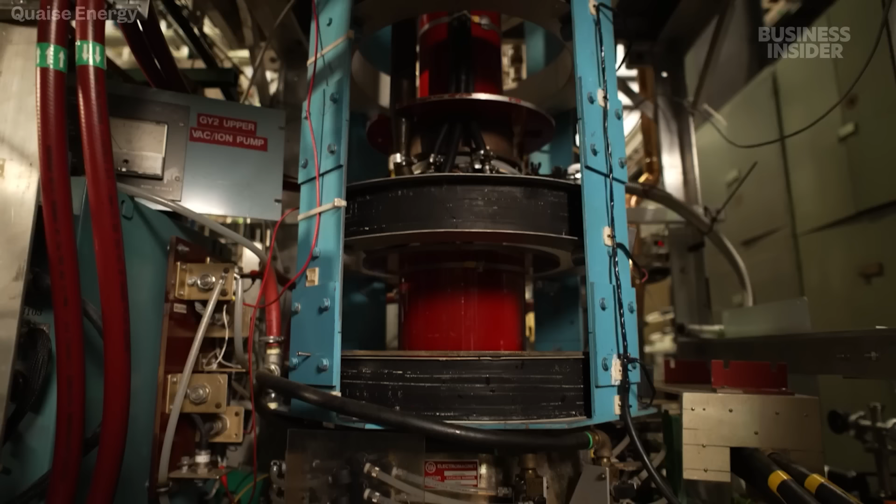But so far, investment has been limited compared to the trillions spent annually on fossil fuels. The industry is still waiting for a breakthrough, and until that changes, deep geothermal isn't just a technical challenge, it's a financial one. So instead of going deeper, some geothermal companies are changing their strategy entirely.

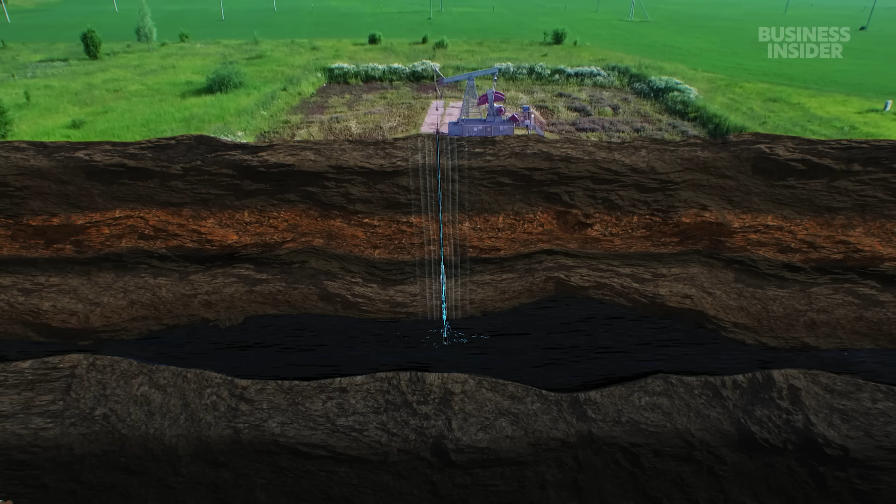I would say the main reason people haven't gone deeper is there hasn't been a reason to. Oil and gas is found in shallow areas, and so the only reason to really drill past 10 kilometers is to do a research well, and I'm sure you found a couple examples of that.

Companies like Fervo are not trying to drill to extreme depths. Instead of going as deep as possible, they focus on creating more contact with the heat that's already there, where the heat is still useful, but the engineering is far more manageable.

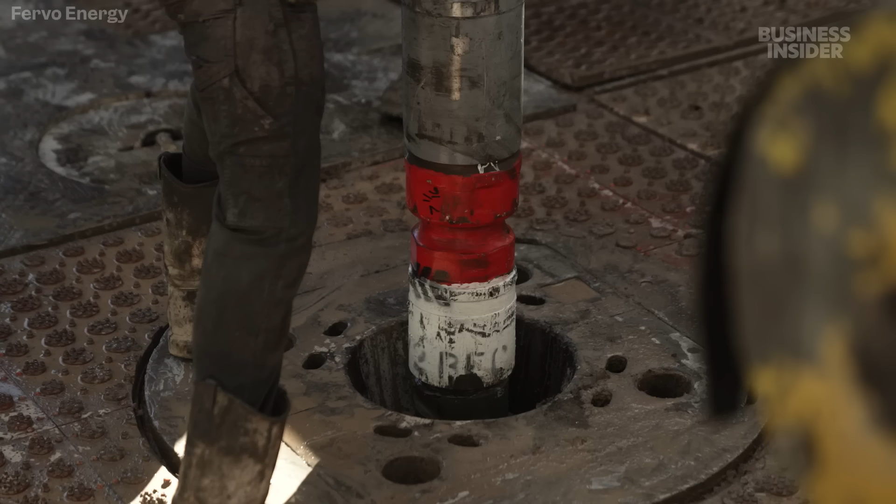And so what Fervo does is we'll drill down into rock that's 400 or 450 degrees Fahrenheit. And then, rather than just leaving a simple vertical well that might only be a few inches in diameter to produce heat from that section, we'll turn and drill horizontally for over a mile.

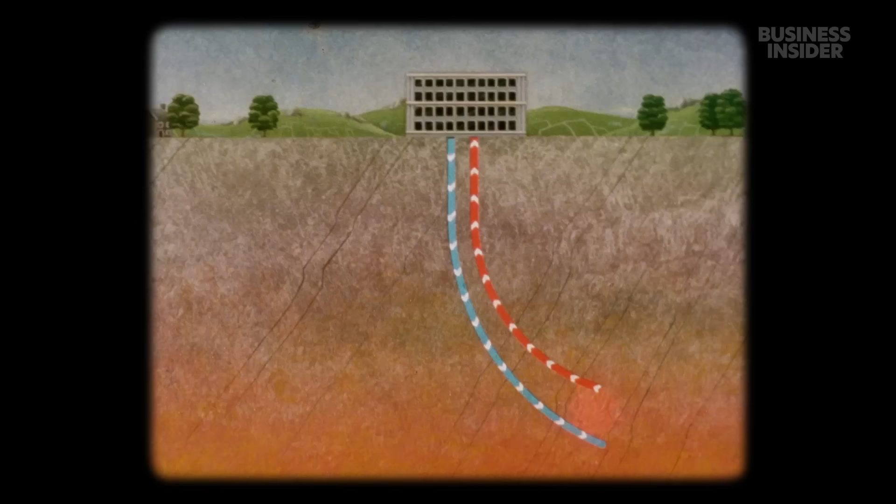That process increases the surface area exposed to heat, which means more energy can be captured. So then they pump water underground at extremely high pressure, cracking open the rock and creating a network of tiny fractures. Water flows through those fractures, moves through the hot rock, heats up, and is pushed back to the surface. It's a process borrowed directly from fracking.

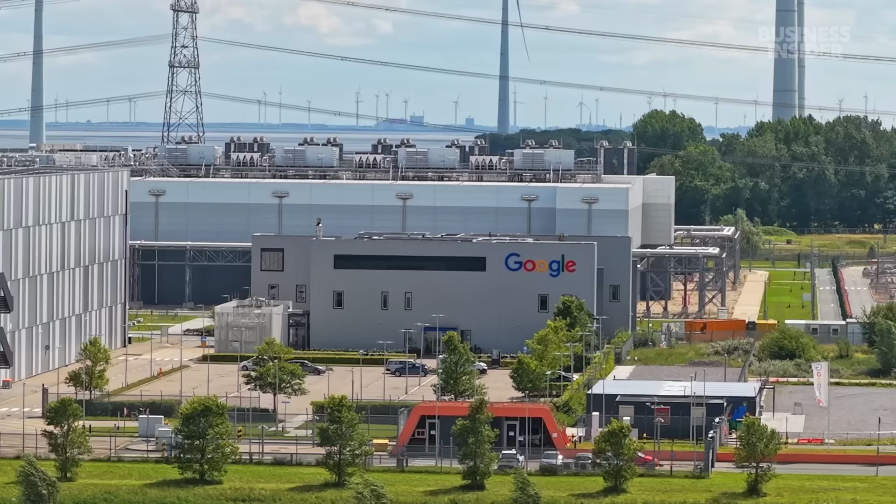Out in the Nevada desert, Google has already signed a deal with Fervo to help power its data centers. You're going to be hooked right into the AI data centers soon, right? Yeah, that's where all the new market is going in energy these days, trying to figure out how we power all this new development from AI in a way that's sustainable and affordable. And geothermal has a huge role to play in that.

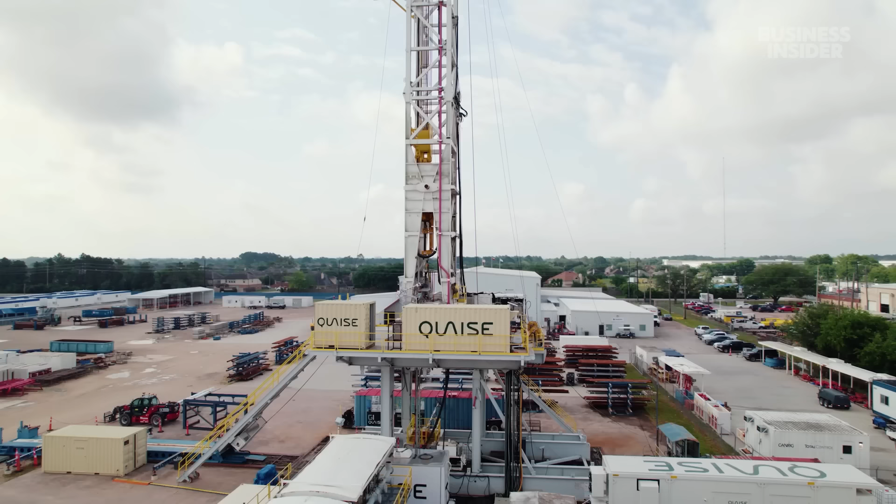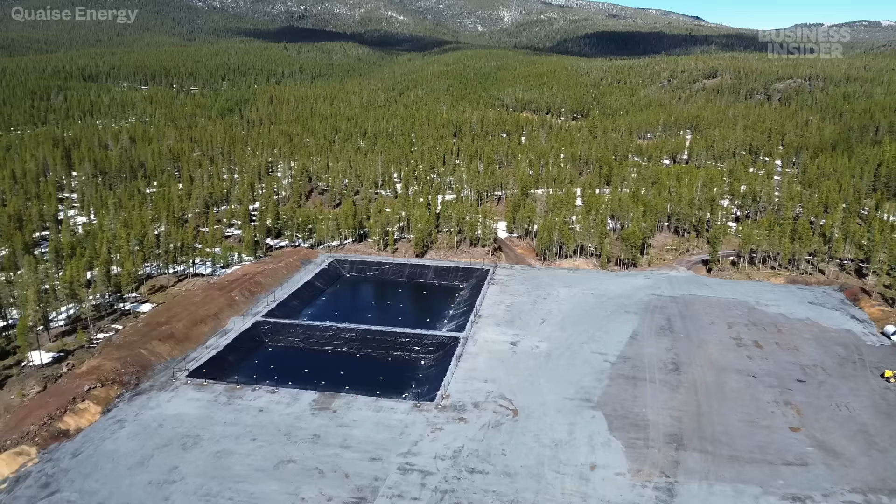Quaise has a goal of drilling the world's deepest hole, and they have a plan to get there. But some of the experts I spoke to remain skeptical. People like Quaise have got a very, very steep road. I don't think that we're going to see a successful supercritical project in the near term. Quaise is still 5 years away from commercial operations at their site in Oregon.

Then there's the issue of whether using gas to return powdered rock to the surface is even viable after a certain depth. Drilling on air can be a really effective way of getting down through challenging formations that mud-based systems struggle with. But there are limits, because as you go deeper and deeper, it's harder to return that to the surface. The deepest holes I've ever heard of that have been air drilled—where they're destroying the rock and blowing it out as fine chips and dust—is about 10,000 feet. And that is pretty expensive to do.

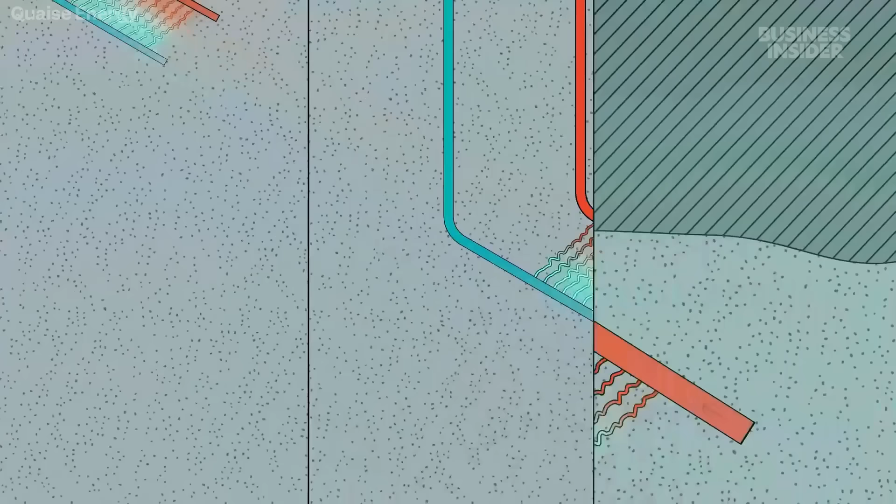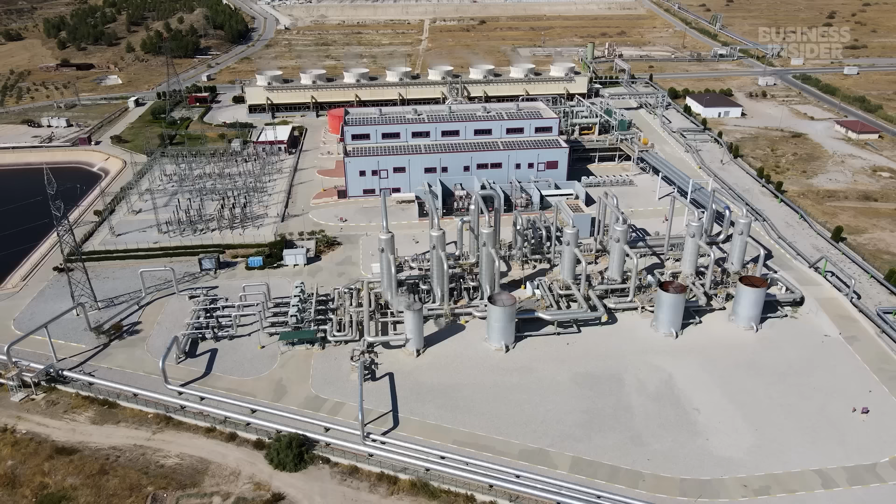Then there's the idea that any geothermal project using heat to generate electricity is incredibly inefficient. As we take that working fluid, vaporize it, and spin a turbine, a large amount of the energy present in that initial fluid escapes to the atmosphere, essentially as a required cooling stage to make the power plant run. Only a relatively small amount of the initial energy is available in the final product, which is electricity on the grid. We're probably today with modern technology at about the 15% efficiency range.

According to Wayne, the best use of geothermal is for direct heating and cooling. If we're taking that geothermal energy and using it directly to warm something up, whether it's our living space, our dairy barn, or our beer operation, we can dramatically improve the efficiency of the system. Instead of taking 15% of the energy, we could use something more like 85%.

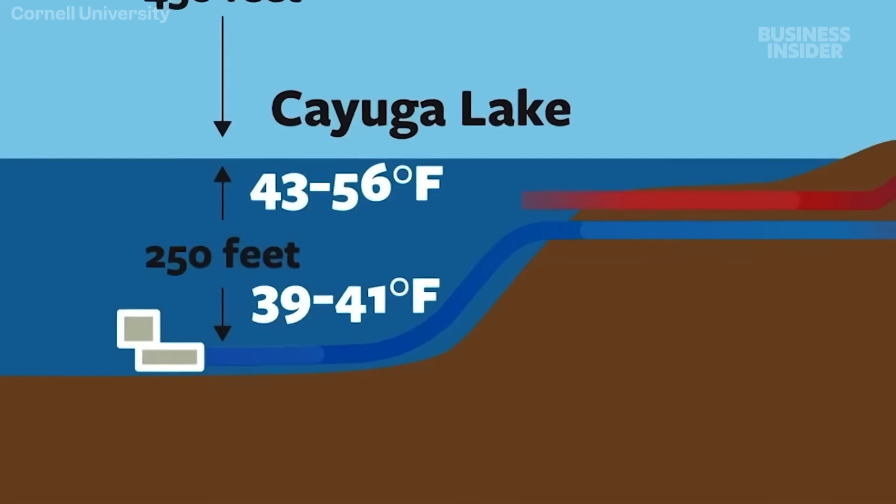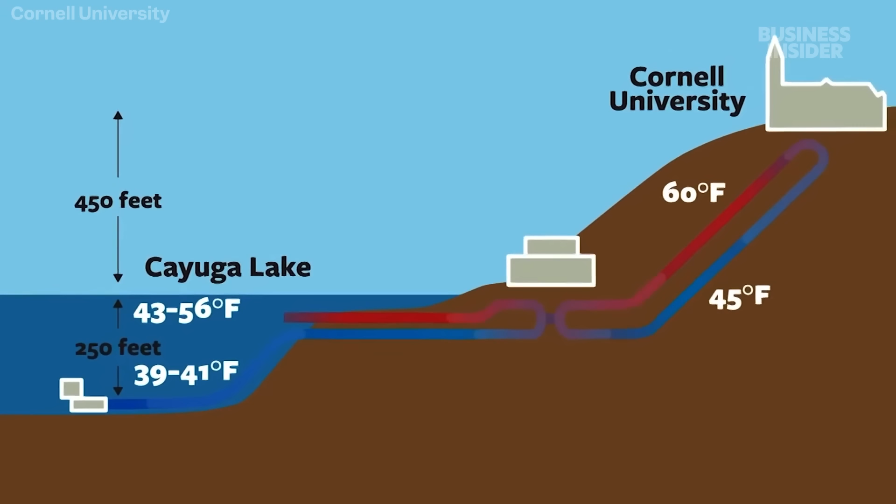That's what his team has done at Cornell University. Instead of traditional air conditioning, they use a passive system connected to Cayuga Lake, where we allow heat to flow from campus to the cold, deep water of the lake. In doing so, we completely bypass the inefficiencies available with any other type of technology. The cooling system in place today is probably 6 to 8 times more efficient than the world's second most efficient cooling system.

And finally, you don't actually need to go to 20 kilometers to access supercritical geothermal. There's no reason, from the point of view of producing usable heat, to go to 20 kilometers anywhere on the face of the earth. It's too deep. From a science point of view, yeah, I could view it as the analog to going to outer space—we're going to go to inner space and try to understand the earth better there, and we may discover some new things. But to claim it's going to produce economic geothermal energy isn't necessary.

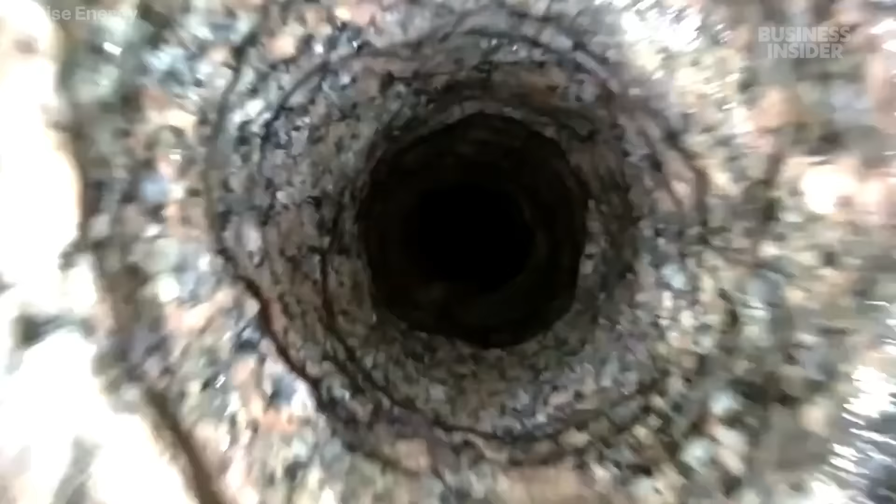But maybe that's not the point. We're always going to wonder about the world beneath our feet. So how far can we actually go? Oh, I don't think there's really any limit. We could go a lot deeper. It's just a question of what the purpose is and who's going to fund it. But it's definitely not a technological limitation.